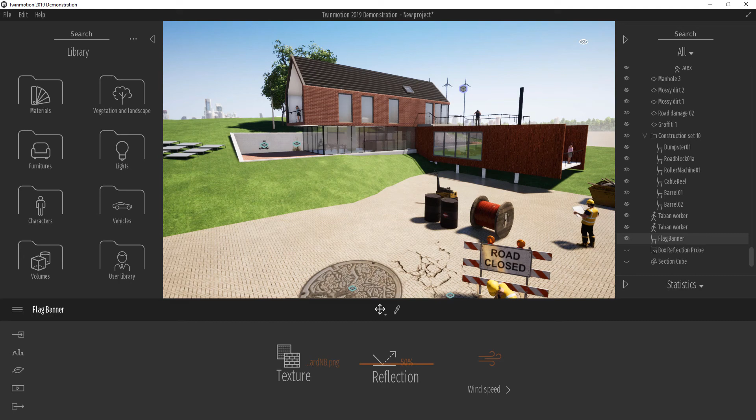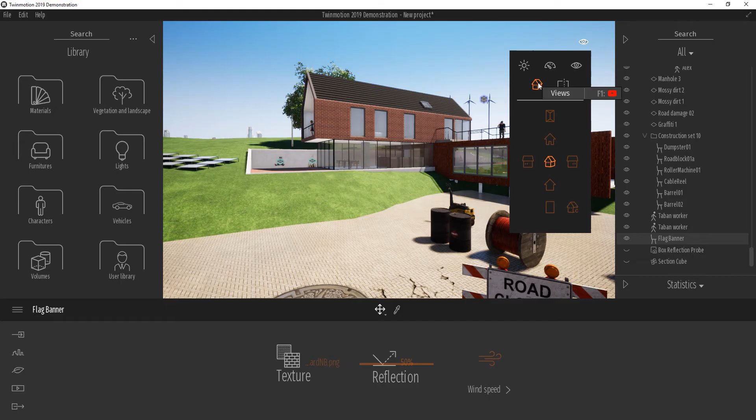Okay, so let's quickly talk about Orthographic View. Let's say you've been working in a perspective view all along and you just want to look at things in an Orthographic View, or maybe you just want to render something in a given Orthographic View. So how you can get that done is you click on the little eye icon here, click on views, and now you can just click on back and you can see the back. You can click here to see the front, you can click here to see the top view, and you can just jump back here to see the perspective.

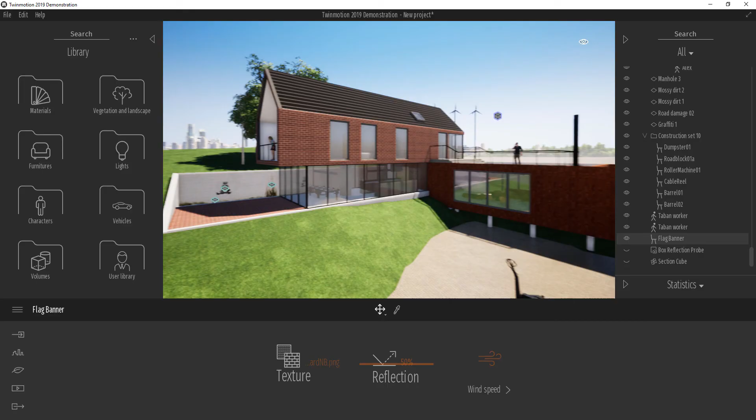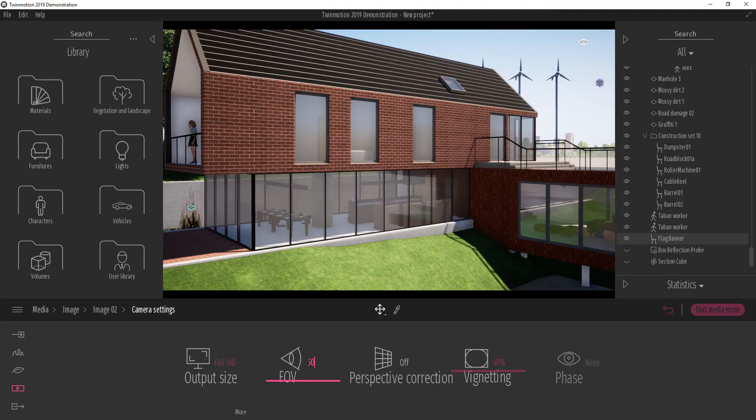And for maybe any reason you want to go ahead and play with how your camera looks, you can do that by coming down to this part of the UI, click here. So I'm just going to go ahead and click on create image, click on the first image. Now having this image selected, I can click on more and change the camera setting depending on what I want to get. So now our field of view is at 90. I can choose to drag it a little bit closer, say maybe something like 50. It also gives you room to type this in, and then after typing this in, I can now zoom all the way out. Now with a feature like this, you can get stuff looking way better.

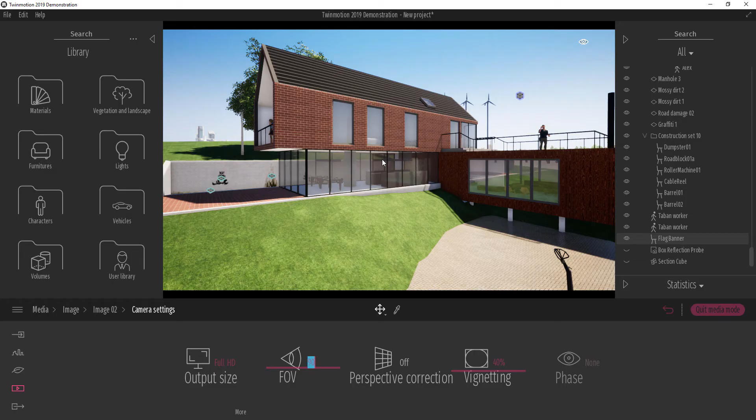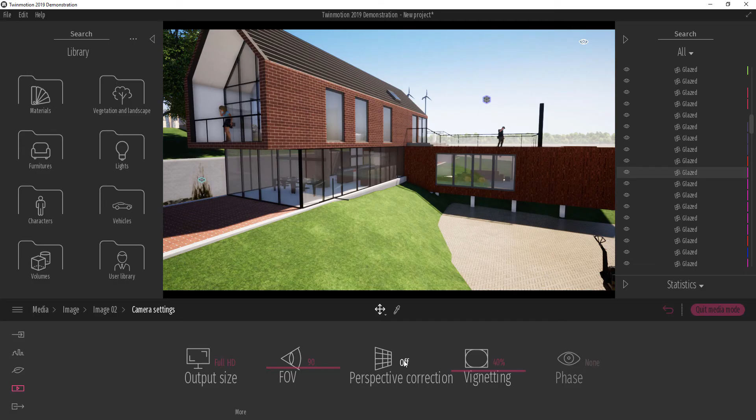Also other stuff that has been added into the new version of Twinmotion is the perspective correction, which means that right now we don't have perspective correction turned on, but once we click here, it turns on. You might see it a little, there's just this slight difference from a certain angle, but I guess from an angle like this, it is worth mentioning. I think this angle was better. I think it's worth mentioning that it makes a huge difference. Previously what I do is I just pick the field of view and change it to what I want it to look like, and then I am good with it.

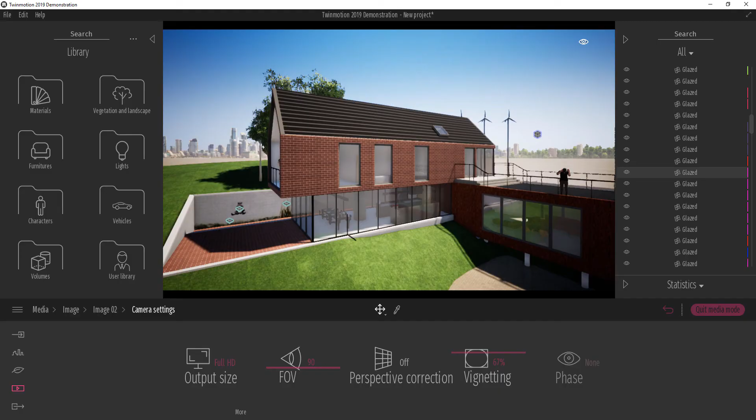But this is nice. And also they've also added the vignetting, which means you can now go ahead and start adding those eye candy stuff to your scene and making them look all stylized and stuff. So that's how you play with the camera.

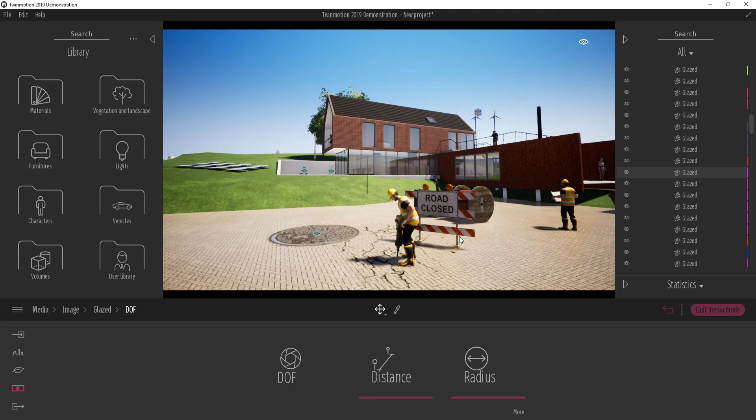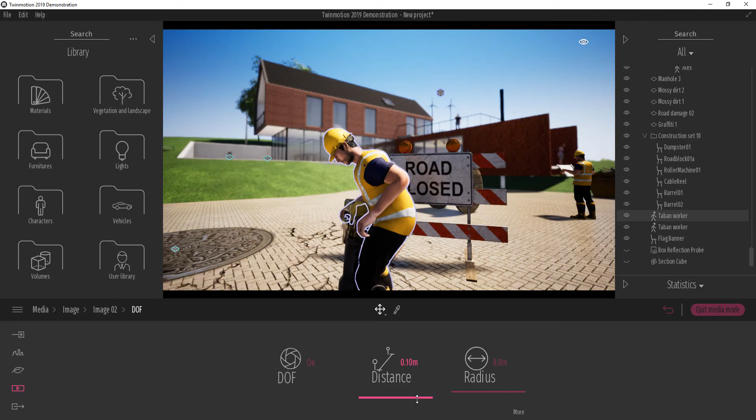And all the stuff that you can do with the camera here is you can change the depth of field, which means that you can actually get a distance of what you want. So I'm just going to go over here and let's believe that we want to focus on this dude. Okay, so I'm just going to go back all the way here, here, here, and then so if I bring this all the way down and turn the radius just a little bit lower, we have a sort of dramatic feel.

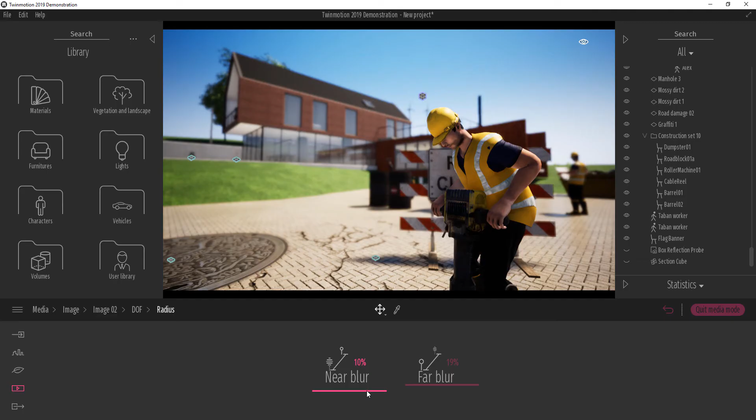Yeah, and you can actually play with it vice versa depending on what you want. You can actually have a far blur and you can have a close-up blur as well. So like I'm pushing this all the way up and the blur is becoming way more, and if I push this all the way up, because I don't have a close-up blur, which is a near blur, we don't get to see it. I mean, you can see what it looks like with the icon there.

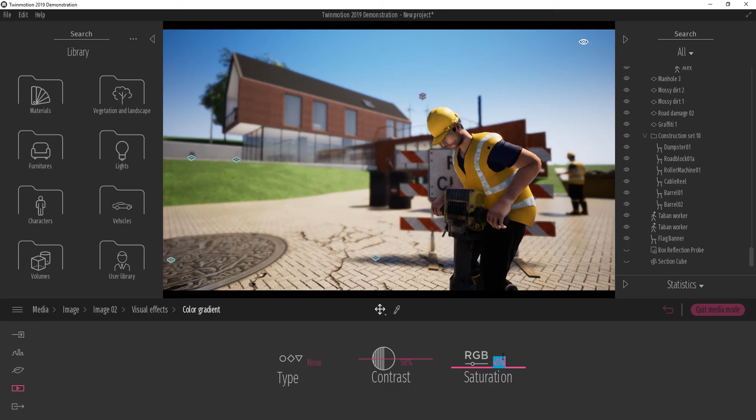Other fun stuff with the camera is you can also go ahead and play with the gradient that comes with it. So let's say you want it to be a bit more contrasty, or maybe you want it to be a bit more saturated. You can do all of these.